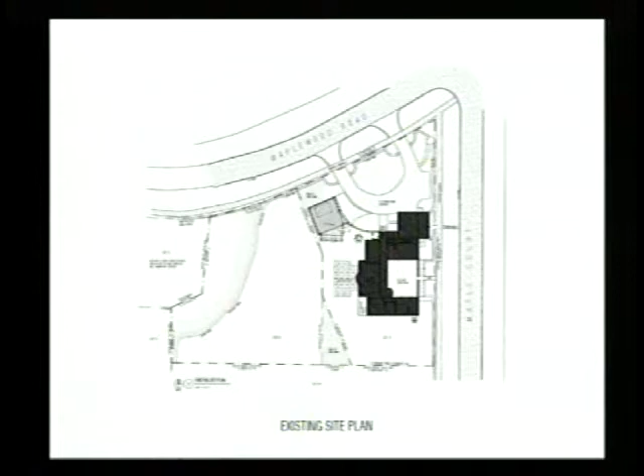So the proposed solution we're looking at in site plan is to demolish this curved garden wall. In our eyes, it really was the one curvilinear wall in the whole project. Taking a step back, we thought we would look at the more rectilinear, orthogonal nature of the original design of garden walls and courtyards and try to follow that as a guiding principle.

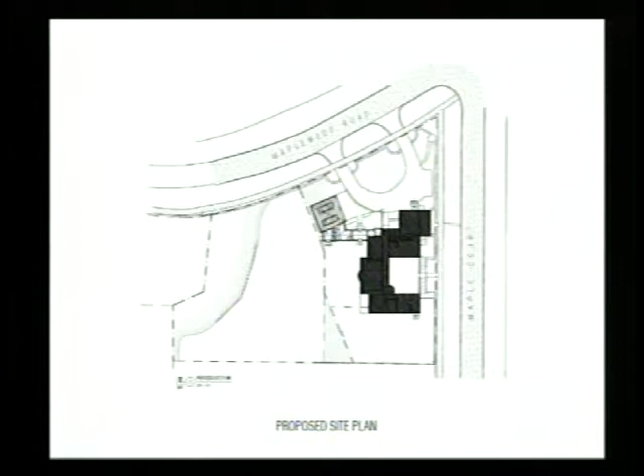We have worked more extensively with Troy and Michele, not only on this specific problem of how to connect the garage and the home, but then enhancing the landscape and developing a landscape plan that would connect this garden wall with the home and with the rest of the property.

So I'll let Troy stand up at the end. He's been working on this very closely with his wife and another noted landscape architect in the community. But I think as you'll see as we get into a larger scale plan, the garden wall that we've planned and then the future landscape improvements at the rear of the home will really help enhance this axial symmetry through the center of the home. It extends from the existing courtyard out into the rear yard.

This is a blow-up of the plan. Programmatically, I think this was described to you at the last meeting, that the primary need being addressed here is a connection of this two-story garage to the home. The kitchen in this house is actually on the east side of the house. The garage is on the far west facade. So really the problem we're trying to solve is to create a mudroom rear entry hall for the family, conditioned space, and at the same time trying to resolve some architectural inconsistencies at the front facade.

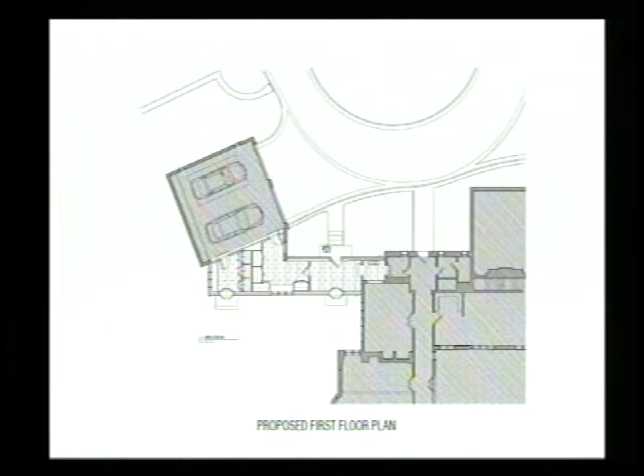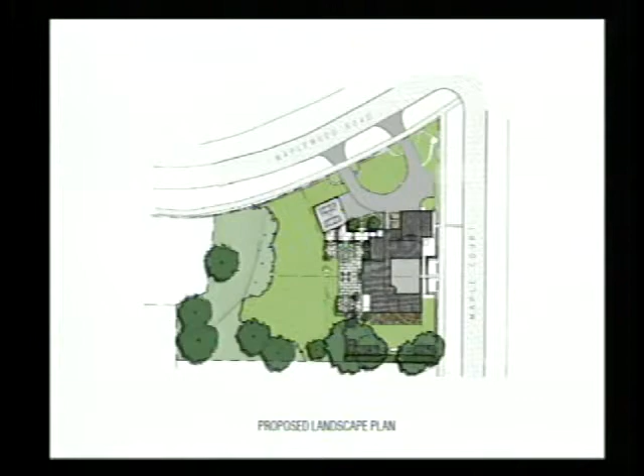So that gives you a sense of how we came at what this garden experience will be like. We feel it's fresh, but very European in orientation. It feels like it connects with the house, and serves a number of needs in terms of how we interact with the backyard, which is largely inaccessible today.

Because the only way to get to the backyard is to go through the living room, which isn't the best way to access it when you've got kids and a dog, right? So as Austin showed you, we get to the back here, and we think it really comes together. You can see the parterres here, the espalier pear trees. We add pots here with large tree-form lilacs, and again, the parterre on this side as well. So we hope that gives you a flavor of where we intend to take all this.

Terrific, thank you. All right, do we have a staff report?

Thank you, Chairman. As was noted, this petition was continued from the June meeting. At that time, the Commission was generally supportive of some connection in this area, but asked the petitioner to explore the relationship of solids to voids, how that mass is articulated, and also look at how the addition interfaces with the existing historic house and the garage.

The petitioner has spent the last couple months studying several different options. I know they're not all presented to you this evening, but this is the preferred plan put forth tonight. Hopefully the commissioners have had an opportunity to walk the property and experience the intimacy of the rear yard and how the garden walls influence the character of this property.

And what was mentioned earlier, preserving this line all the way down to the foundation was very important to us. By setting that wall back, maybe if we go to the elevations, it becomes clearer. We bring that very strong vertical line back to the front facade. So that deep shadow, this is an 18-inch reveal here, I think gives much more strength to this existing gable end.

Austin, the height of the wall of the new addition, if you will, can you walk us through that? And then how's that roof transition handled? How does the roof work actually in this area?

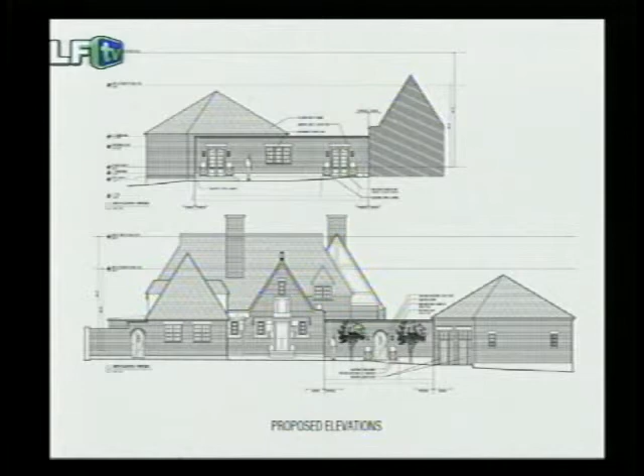Yes, and we've gone back and forth. We're obviously trying to keep this wall as short as possible. So we were playing with the parapet wall condition, but with the parapet, you need at least 4 inches of limestone coping, 6 to 8 inches of flashing before you get to the flat roof, and then another 12 inches of structure. So instead, we're still going to propose that this be a limestone coping detail, similar to the other details that you find in the garden walls, but then there'll be a flat copper roof on top of that. So all you'll see is a small drip edge on top of the limestone, but it will appear as a garden wall. You really will not perceive a roof on top of it.

The height of that parapet was really established by trying to pick up on this datum over to the left of the front entry, and then also trying to make this space as compact as possible to strengthen the difference between the height of this coping and this coping of the new addition.

So over on the left-hand side, you've got a kind of conventional limestone, maybe 3 or 4 inch cap, or maybe even less? I believe it's between 3.5 and 4 inches. Yeah, so then on this side, you'd have something along those lines, plus then another copper drip edge, couple 3 inches again. Yeah, and we could use a zinc-coated copper drip edge. It would look more like a lead-coated copper, which you can't get anymore, which would blend more with the limestone, I think, to help minimize the appearance of any kind of flashing on top of the wall.

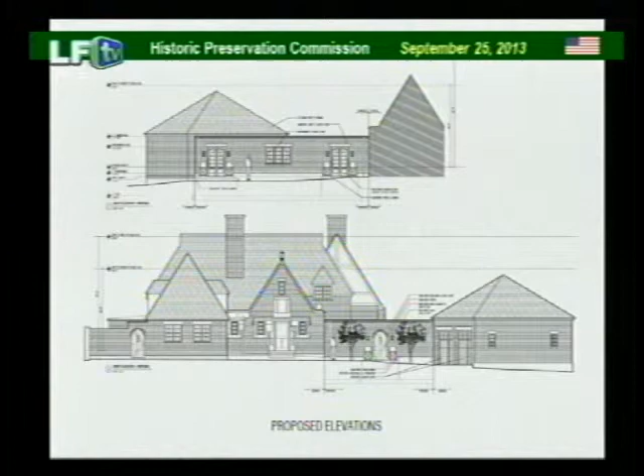Okay, other questions or comments for either the staff or the petitioner? All right, now's an opportunity for the public, if there's any public testimony on this subject. And is there any? Sure, come on up and tell us about it.

Hi, Jan Gibson, 59 East Franklin Place. I think you received our Lake Forest Preservation Foundation sheet, and I just wanted to add one more thing to this. It looks like a great addition and nicely done.

I talked with Paul Bergman, who has the Stanley Anderson Archives, and asked if he wanted to add something. He said just to be very careful about the stonework and brickwork, as it's some of the finest we have in Lake Forest right now. So whoever does that mortar and that work, I know it'll be well taken care of. Anyway, it looks good. Thank you.

Any other public testimony? I see none, so we can deliberate if anyone has any deliberations.

Yeah, I think this is a good resolution. Getting rid of the curved wall and setting back the addition de-emphasizes the garage and that curved wall, which I thought was a problem to begin with, and taking away the pseudo breezeway we were looking at before is appropriate. So I like the resolution the way it is.

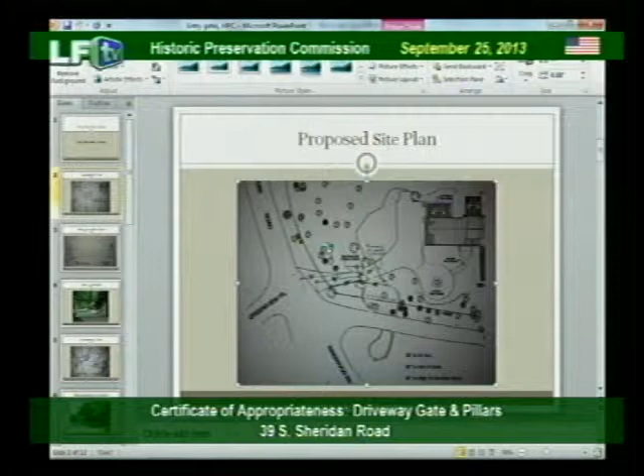We also received... I'm sorry this isn't bigger, if I click on it, will it expand? Down at the bottom right corner, maybe? Oh, right, no, maybe not. Let's see those icons, here we go. It's just a sliding scale. There we go. Oh, there you go.

This was a prior location that was proposed, and we did receive conditional approval for that location for the entry pillars and gates. However, when it came to implementation, we realized this is sort of a pinch point as you come through the driveway and enter the property. This is mostly natural vegetation, typical buckthorn and overgrowth, as well as in front of the historic wall. We found that with the gates in that location, you've already entered the property and come to the open area of the yard, so those gates felt more like mid-yard gates as opposed to entry gates and pillars.

So with that in mind, we were interested in moving those forward 20 feet. That location was chosen as there is a large oak tree here, and we need to create at least 10 feet of separation to avoid the root system. So that's the 20-foot difference there.

That leaves us about 26 feet from the end of the historic wall, about 28 feet from the property line, 40 feet to the end of the driveway, and 56 feet to the edge of Sheridan Road.

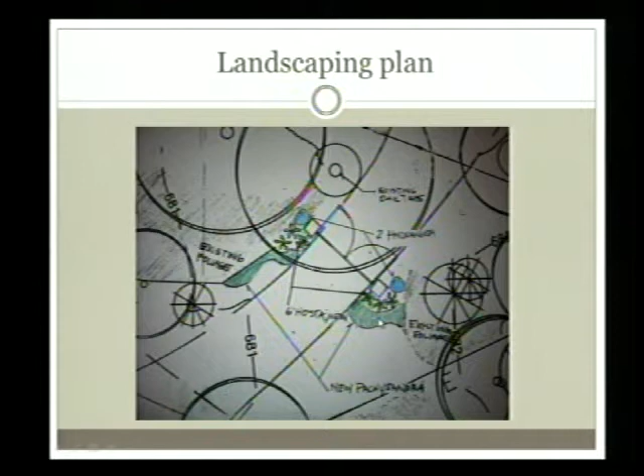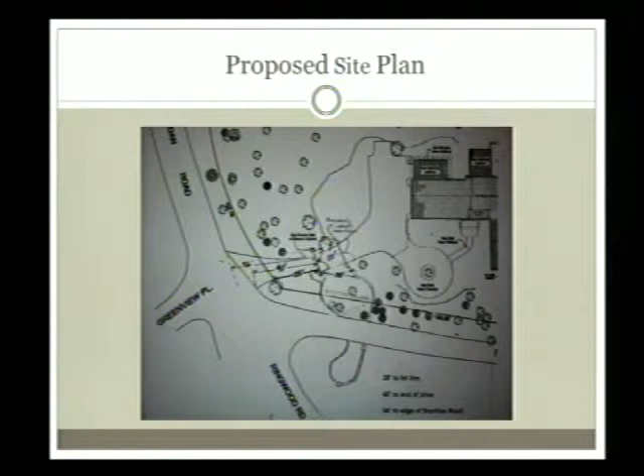I'll be honest, when I went out there, I had to look a couple times to find this wall. It's so hidden back behind everything else.

Any other questions for the petitioner or staff? First of all, no lighting's proposed on this, correct? We want to keep it that way. When I was out there, it looked like there's a gas or electrical light fixture right next to where that north pillar is being proposed - is that being removed? Removing, yes, that's our plan for that. It's non-functional, okay, non-functioning, so it's not going to be refurbished and lit up right there.

And is there any automatic opener on the gates? No, we're intending them to be more manual, just visual and left open typically, unless they feel a need to close them. But manually - most of the time we see these in the open position. Correct. Yeah, thanks. They're going to open in or out? In.

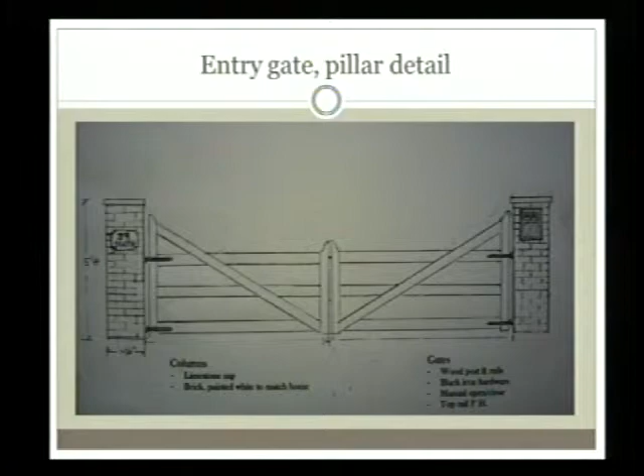So if you were going to continue to use brick and reduce the scale, what would you have to do and how would it compromise? You could remove half a brick and do a brick and a half per side, which would reduce it by about 4 inches and make them about 12 inches square. And would that still give you an opportunity to hang the mailbox there and the sign you'd like? I don't think the mailbox would fit inside of that size pillar.

Does the color choice of the gate match any trim you're planning? Well, if we paint the front doors, we're not certain whether they'll be painted or stained. So if we paint them, we'll tie that into the gate color.

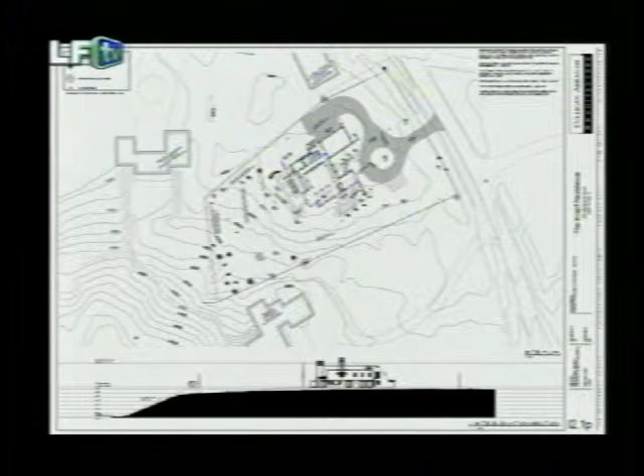I trust you looked through the topography - it's pretty flat land, though it does slope off to a ravine off the back. You can see the existing circular drive and the existing structure here, and a section cut through the property. Here's the actual property line where it starts to head down the hill.

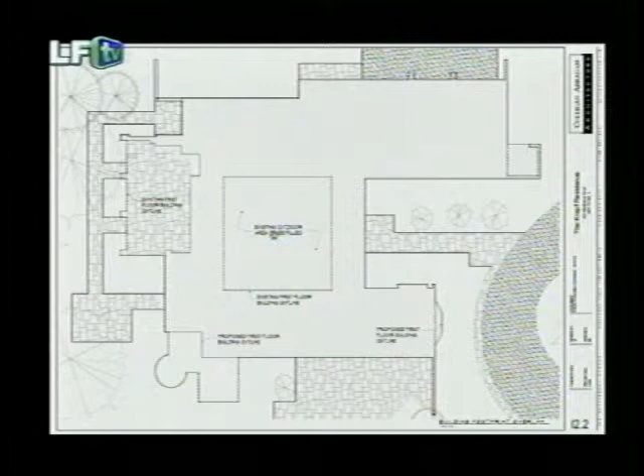As far as keeping the existing footprint, this hatched area is all of our existing, including this area here, which will be removed and become an exterior area with the existing fireplace, allowing for greater light into our center courtyard that will be the great room. This greenhouse, which is kind of a glass block, half brick wall, will be removed and the brick patched and fixed. The bay window will be added in the front, and the wing walls will all remain as is, with an addition of one on the north side.

The landscape will be cleaned up. It's pretty heavy off the street line right now, so Mariani Landscaping will clean it up, and if you guys have questions, she's here to ask about that later.

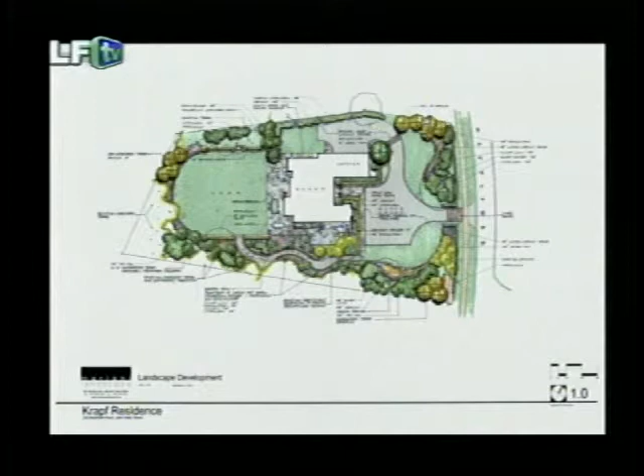As for the tree removal plan, nothing major. Some of the crab apples, I believe, will be removed, along with any diseased and not healthy trees.

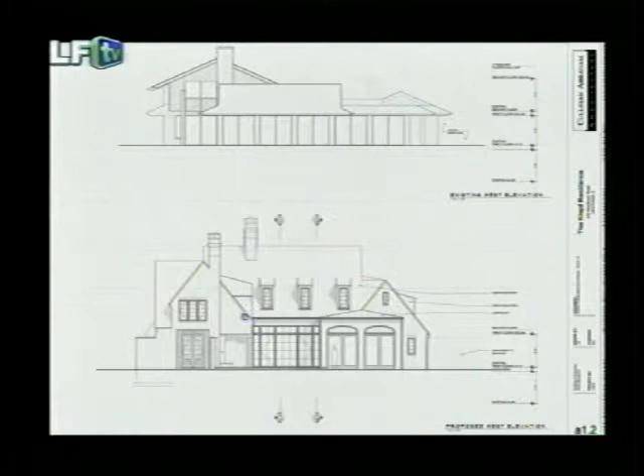Up to the rear elevation, you can see the kind of repetition of the sliding glass doors between these solid brick piers, with the low roofs and kind of the second floor mass or balcony up there. So we've raised this roof, brought the scale to the center, cleaned up some of these lines, and created more solid planes instead of stepping in and out as all this glass and brick does existing.

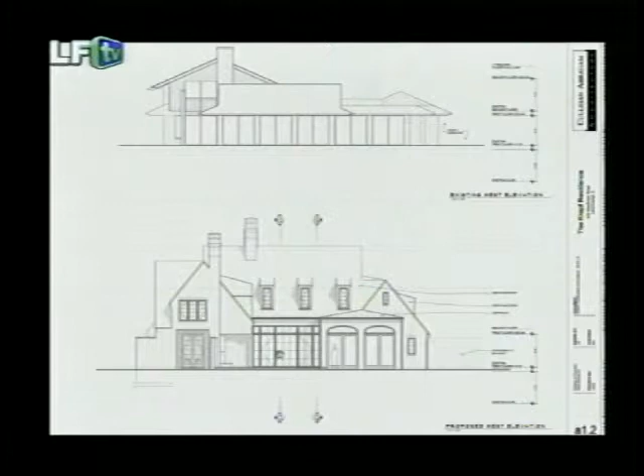So this back entry is now kind of in relation with the front entry. They speak together, again with the lines of the existing home and all those brick piers in that center courtyard.

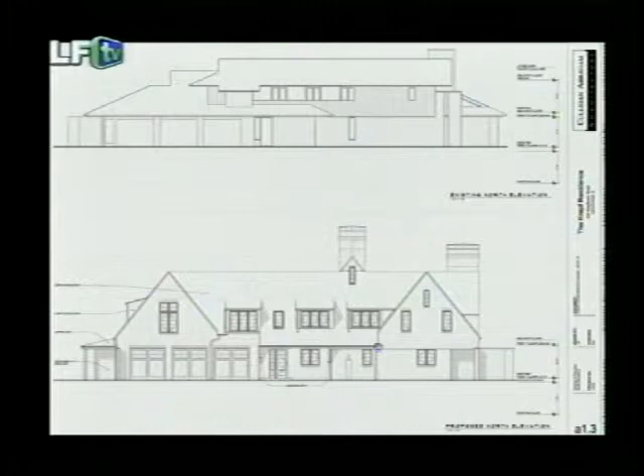So this is the garage side, the northern side. We're proposing to keep the garages, add some dormers for the rooms above. This whole gable here, like I said, is turned towards the street just to keep the scale down in relation to the neighborhood and the street appeal. Just new doors, new windows everywhere, again, painted brick. And this area is all overhanged here, as is existing, in kind of a covered back entry.

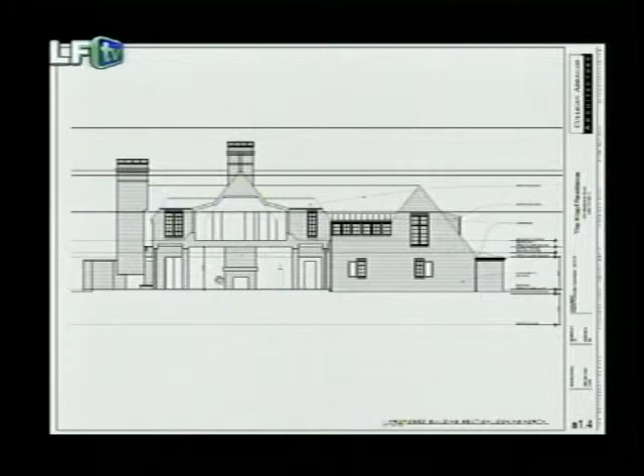So this is a section cut, cut through the center of the home. You can see kind of the entry. Here's where that solid brick wall was prior; now we have a couple of punch windows. We have some large casements with transoms above for the bedroom up there. This hall has even a whole set of just picture fixed windows to allow for a lot of light into the entry area. And you can see the great room with the fireplace and a higher ceiling with bedrooms above.

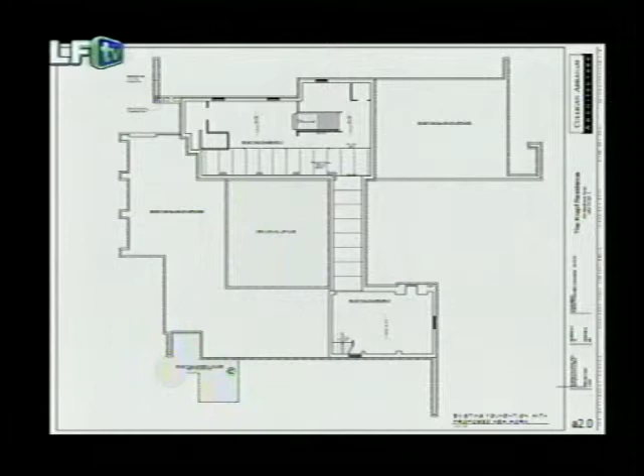Existing footprint, foundation, not much changing. This is existing first floor plan. You can see the courtyard here that is kind of unused. There's the entry straight through the house into that, where you'd have to drag all this equipment through.

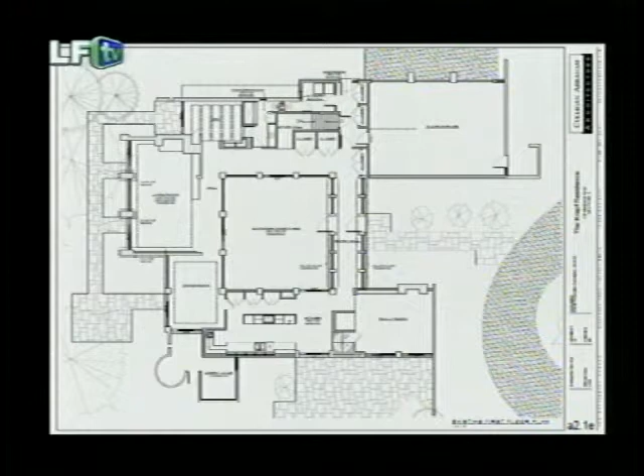This is the area we're proposing to remove and become an outdoor area. These walls will be removed, the piers will be removed, the fireplace will remain. Programmatically, it will remain as is. Down here with the den, this area is going to be reworked in the kitchen den area.

So you can see not much has changed. This area is removed. This area has been cleaned up a little bit for a greater laundry room, mudroom. But programmatically, it's all the same. A new kitchen layout.

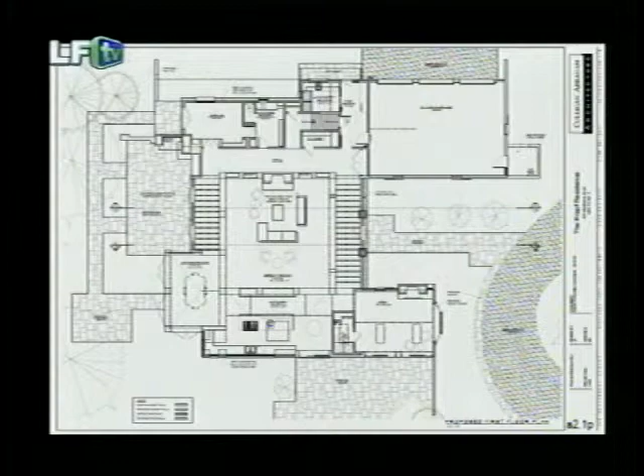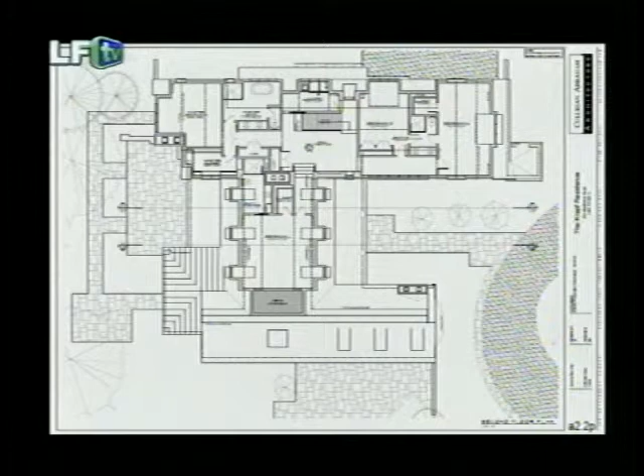Just to show the scale of the neighborhood, the house to the south is pretty set back on its property—it's not even visible from the curb. This is a 4-car garage immediately to our north. You can see the scale of the existing to the proposed is not much larger than what is occurring to the north of us.

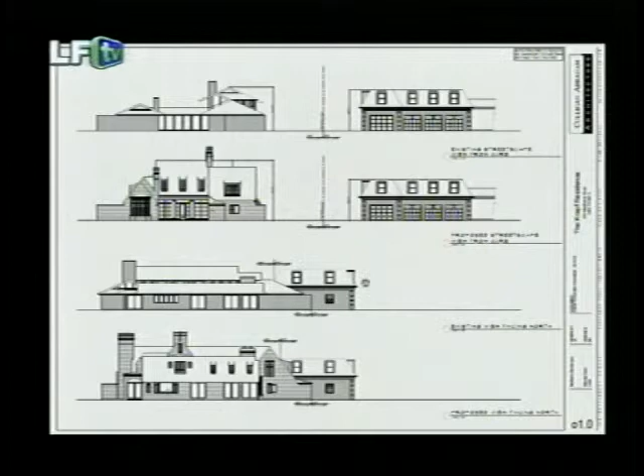And then you can see from the side view, as if I was looking north from our property line. This is a rendering of our proposal.

You've got the bay and the whole glass front here with some columns, and then just elegant detailing around the brick—some thin rake boards, thin dormer profiles—and you have the high-pitched roofs of the main house compared to the lower roofs on the dormer that just swoop up. We'll have some copper, there's a flat roof here, some copper on this guy as well that's existing.

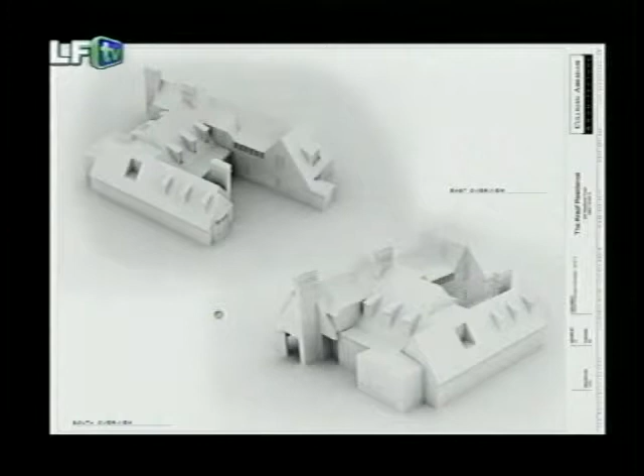Just some aerial shots of it, massing models. And that's that. I'll show you quickly—I know I'm running out of time here—some imagery of where we got some ideas.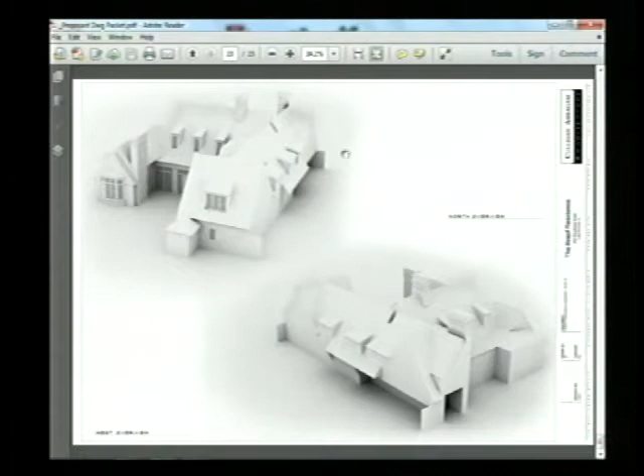Actually, the one before—yeah, maybe that one for now. Thanks, yeah, I printed out so it's facing the public at this point. You guys good? You guys have drawings in front of you, so.

And then, Megan, if you want to give us a staff report on this one. Thank you, Chairman Pairitz. The commission doesn't see a lot of complete demolition requests, but certainly there have been a few that come before the commission.

For this particular project, given the character of the existing home, staff is really looking for input and direction on this petition to answer that threshold question of is demolition appropriate and consistent with the ordinance standards. For the Historic Preservation Commission, demolitions are reviewed looking at whether or not the structure contributes to the distinct character of Lake Forest, its significance to the community, and the association with an architectural style.

Evaluating that, I think, is important in this case because it is a unique architectural style in Lake Forest. We don't have a lot of modern contemporary structures. To that end, the petitioner has provided the commission with some documentation to support the demolition request. They have hired a third-party preservationist to evaluate the architectural integrity of the existing home and give some context for the commission to evaluate this request.

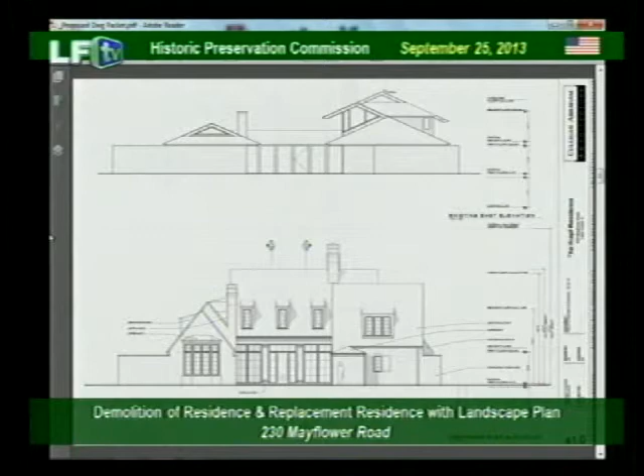The bay window, relative to the entry, looks quite diminutive in this elevation, and I don't think it's quite the same. If you go back to that Adler example for a minute, that'd be interesting to see again. You can see the scale of the bay window here is quite in character with the entry - it's not small relative to that entry. Matter of fact, it might even be feeling a little bigger, but it's interesting - they're very compatible. So that may just be something that requires a little more study.

You've chosen one of my favorite styles actually to emulate, so it's hard to pick on that. But can I pick on it? Sure, please do. Okay, great. Because I'd like to sort of backtrack, if I could.

Yeah, this is the Historic Preservation Commission, that's what we're actually asking questions for. Thanks, John. And so I just wanted to ask us a little bit more relative to the historic work, which has been presented to us by the petitioner. Are you saying my question wasn't valid? No, all of your guys' questions are really unbelievably fantastic. I just thought that...

Before everything completely went to what kind of house we're going to build here, I thought that I might at least put my oar in on the issue of whether or not this building should be demolished as it sits. So I wanted to talk about that a little bit. I have some questions relative to that, and the questions are related to the historical, preservationist material which was presented to us. And then I'll probably have some other comments to make when we're considering that.

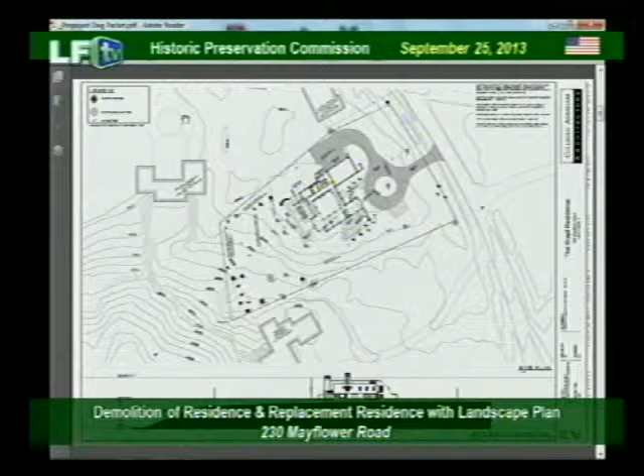Before you go to this plan, could you go to the existing site plan? I'm interested in understanding the existing site better. Can you describe the existing vegetation on this plan? Right now the border is a mix of mature spruce that we want to retain, along with some buckthorn, honeysuckle, and other stuff. Go back to your new plan since it's not shown here. The whole mixed perimeter we really want to retain as it is today, eliminating things that are diseased, dead, or haven't been maintained. We feel you need that transition to the mature size of the trees. The only trees proposed for removal are crab apples closer to the house, an old river birch, and one ash that already came down diseased.

So from the street view, and from surrounding home views, what they're going to see vegetation-wise is pretty much what's there now. It's going to be fairly similar. We're actually adding some shrubbery where it's gotten a little leggy. The largest change from the street view is a crab apple in the center of the existing driveway, which is being proposed for removal. But besides that, the street view wouldn't change.

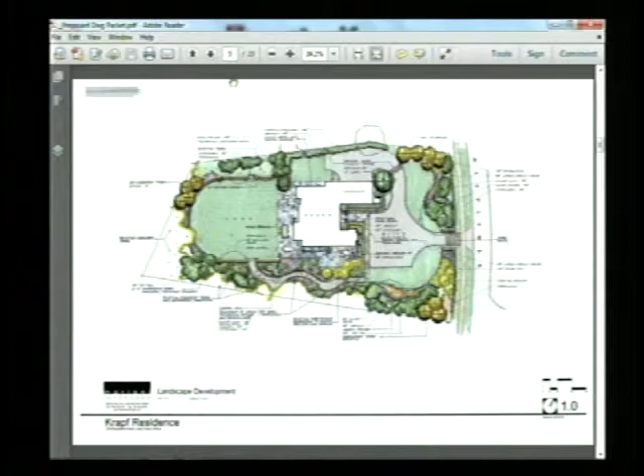Got it. Other questions to staff or the petitioner? As much as I regret seeing this house have to be changed, because I think it will be a loss to the community—we don't have many examples like this in town—I understand that making this much revision to it would probably make the original unrecognizable anyway, so it would be lost by virtue of being significantly modified. But...

Getting back to the proposed elevations, I'm a little confused—for instance, on the south elevation, it looks like you're retaining or duplicating the sliders as they were, kind of, which doesn't seem to go with the rest of the house very much. And I'm also puzzled by the elliptical transoms, which don't seem to relate to anything either.

As far as the transoms, we have these large expanses of openings between the existing brick piers. To break up the repetition around our proposed center rear entry, we looked at many different proposals for what to fill in here—whether to use more brick and make them more solid, or semi-retain their existing character.

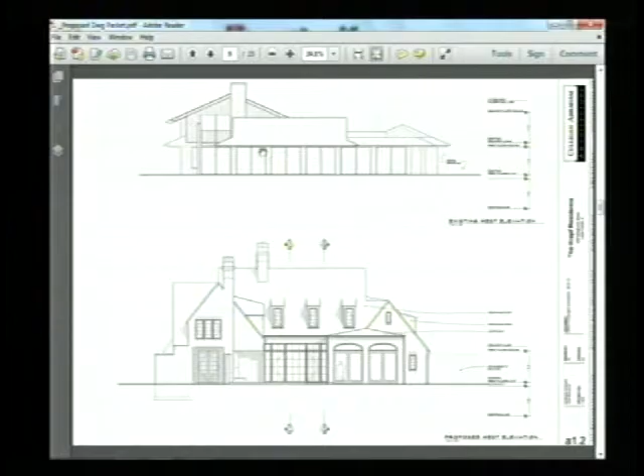John will like this—can I ask a question? I'd like to direct the commission to think about the big picture now that we've had a chance to ask questions. There are a lot of detailed nuances to this proposed house that we could pick apart and ask many questions about, but I'd like to focus back on the big picture, because I don't want us to get mired in details. I'm interested in getting public comments, and then moving to deliberations, where we have some qualitative remarks that are important. I'd like to follow the form of the meeting.

Could I ask one question first, more along the lines of what you guys are thinking about—why are they going to do what they're going to do? Sure. So, the brick used here, the pink or orange or rose Chicago common brick, is just so iconic for houses of this sort—I don't have to tell you.

It's just so iconic for houses of this sort. When you look down the road a little and look at the Glore House, you see that brick reverberating back and forth across the way. Why do you want to paint it white? Well, it comes down to adding new courses on top and trying to match a lot of the grout and the common brick itself, which has as many varieties and hues as you're talking about—it's something you have to get dead on, otherwise it looks bad.

So matching the brick is nearly impossible, and therefore you need to paint it to hide it. It's also a want from our client. The white brick was on their list of wants, and that was it. Did you talk to them at all about this material and its role in Chicago architecture? Have you played an educational role in this?